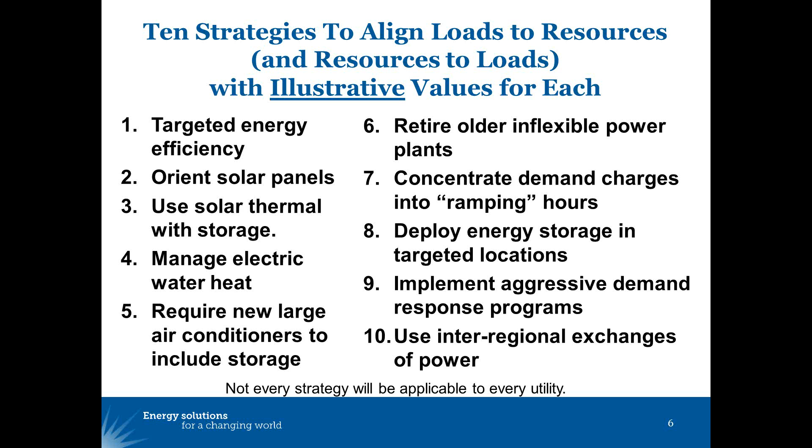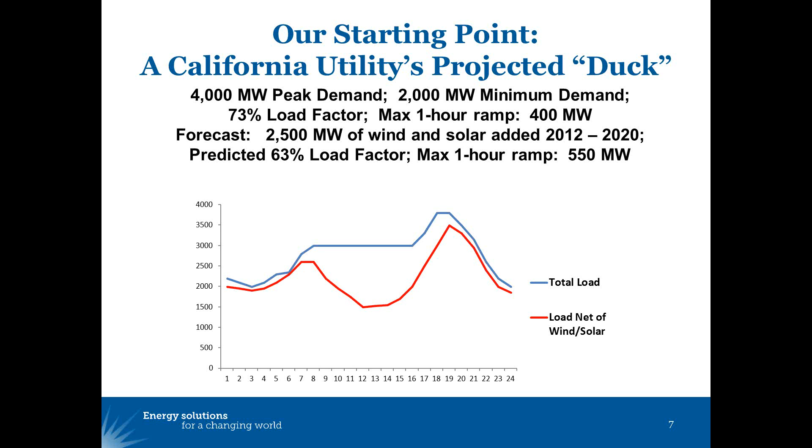So, good morning or afternoon, depending upon where you are. I'm in Olympia, Washington. Am I being heard okay, Dave? Yes. Good.

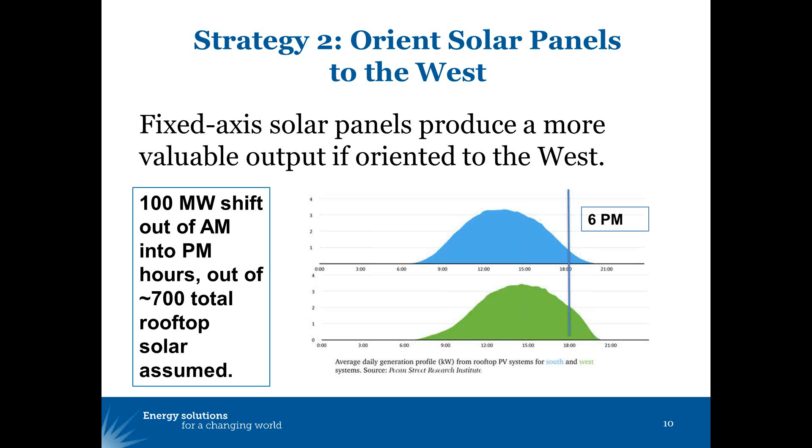I'm going to start by telling you a little bit about myself. I've been an economist and working in the field since the late 1970s. I'm an economist, but I tend to stray into technical issues. I was a founding member of what was called the Regional Technical Forum here in the Northwest that advises the region on a whole host of energy efficiency and energy planning technical issues. I've worked with RAP since 1998 in about a dozen countries and about half of the states of the U.S. And I've been an author or a co-author on almost a dozen different RAP publications, several on rate design, some on energy efficiency evaluation, and the most recent one that we're talking about today, Teaching the Duck to Fly.

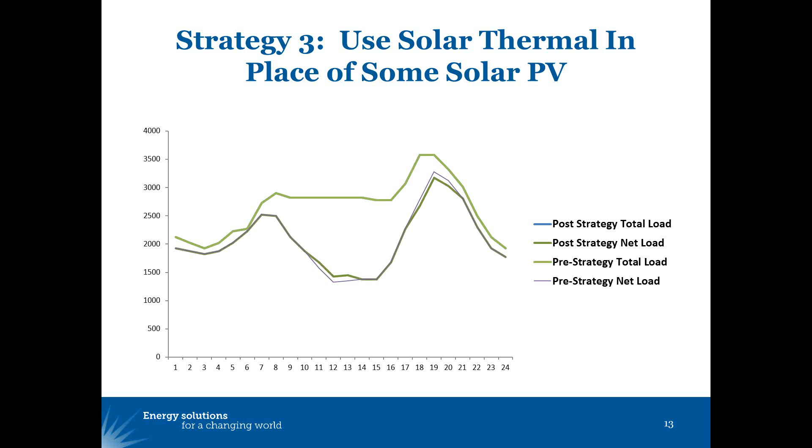So what is this duck? If you haven't met the duck yet, you will soon, or you just have. The California ISO has prepared what's called the duck curve. I think it was actually first created by San Diego Gas and Electric. But what it shows, very simply, is that as more and more solar is added to the California power system, solar meets the mid part of the day load, but disappears at night.

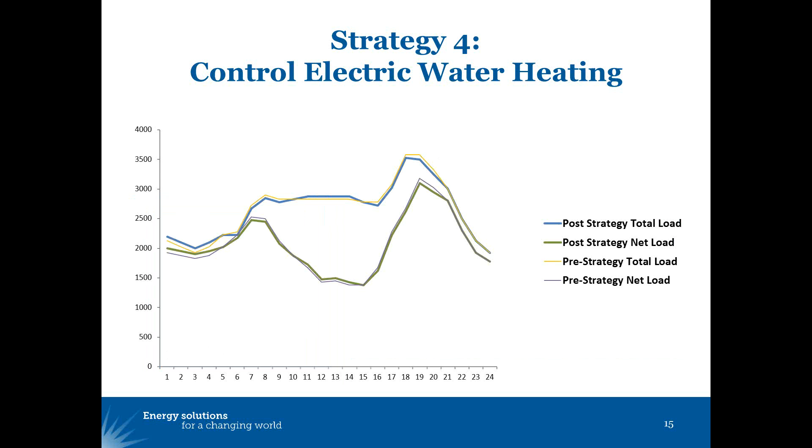And that leads to a situation where in the late afternoon hours, the non-solar generation system needs to ramp up immensely, in this case doubling its output in just 3 hours' time. And that is a very challenging ramping situation, we call it. There's also the risk in the middle part of the day of over-generation, that is, more generation being on the system than there is load, and something having to be curtailed.

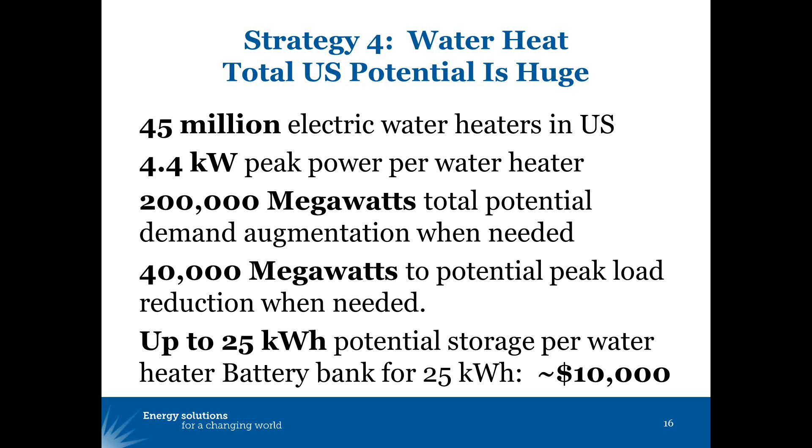And we're experiencing this in California, in Texas, in Hawaii, and in Germany today, where, because of the baseload plants that can't be turned down, nuclear plants in particular, and coal plants that can't be taken below their minimums, we wind up with more generation than we can handle. The causes of this challenge are really pretty simple. We've had variable loads forever. The electric industry grew up with those.

Wind is a variable supply. It's predictable sort of on an hour or 2 or 3 ahead basis. It's roughly predictable further ahead than that, but it clearly varies from day to day and from hour to hour. Solar is extremely predictable as to when it's going to be available, but it's predictably not available in the late afternoon when air conditioning loads and lighting loads tend to increase and the sun goes down.

But guess what? Ducks can fly. I mean, a duck in water has very much the shape of the California ISO graphic. The fat body floats, the tall neck breathes, and the duck just does fine in water. But a duck in flight has a whole different shape. It straightens out its body, stretches out its neck in order to have less wind resistance than it takes to wing. So our job today is to straighten this little ducky out. We're going to do that with 10 strategies.

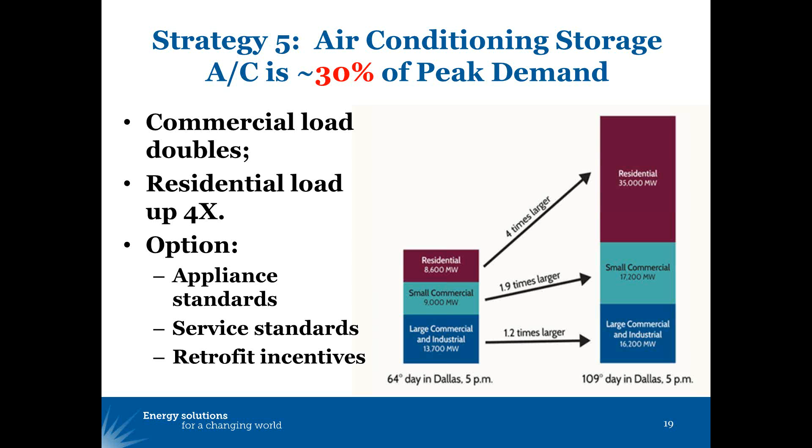But targeting measures have a 3-to-1 ratio between the on-peak savings and the off-peak savings. Kitchen lighting is a very good example of this. Kitchen lighting comes on at the time of the morning peak and at the time of the evening peak. Air conditioning is a huge contributor to the afternoon peak. So there's a number of specific measures that can be targeted for their afternoon peak orientation. And so with this 5% of total usage, the whole requirement shifts down, but shifts down more during the peak hours than during the off-peak hours.

The second strategy is orienting solar panels to the west. Most residential and most rooftop solar systems are on a fixed axis. That is, their racking is fixed. They only point one direction. And that output is a little more valuable if it's pointed to the west. Here graphically I show what the output is at 6 p.m. In blue, the panels are pointed south, and in green the panels are pointed to the west.

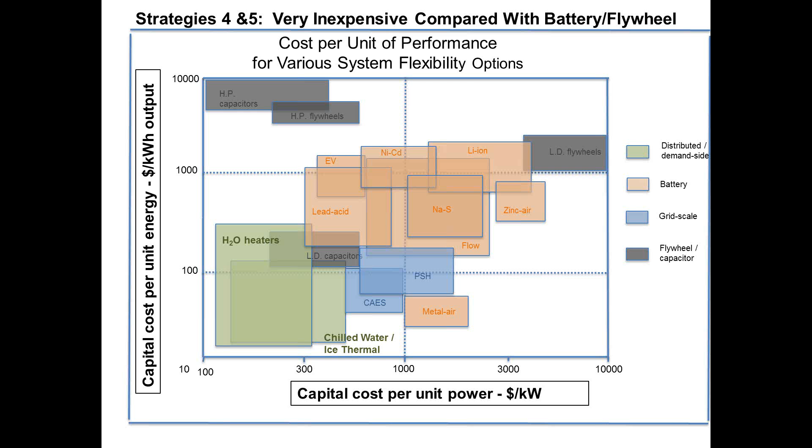You get about the same amount of total production, but you get a whole lot more production during the late afternoon hours. And here I assumed a 100 megawatt shift, taking it out of the earlier morning hours and moving them into the later afternoon hours. That's out of a total that this utility forecasts of 700 megawatts of rooftop solar. You'd need an incentive in the pricing and an incentive to the installers to take advantage of this, but it's a fairly modest strategy. And it shifts.

Now you'll notice that each of these is shown compared to the cumulative effect of the strategies before. And we do this so that you can see that each one of these strategies makes a very small difference. And here you see that the net load is increased a little bit in the morning because the solar isn't producing as much, and it's decreased a little bit in the afternoon when the solar is producing a little bit more.

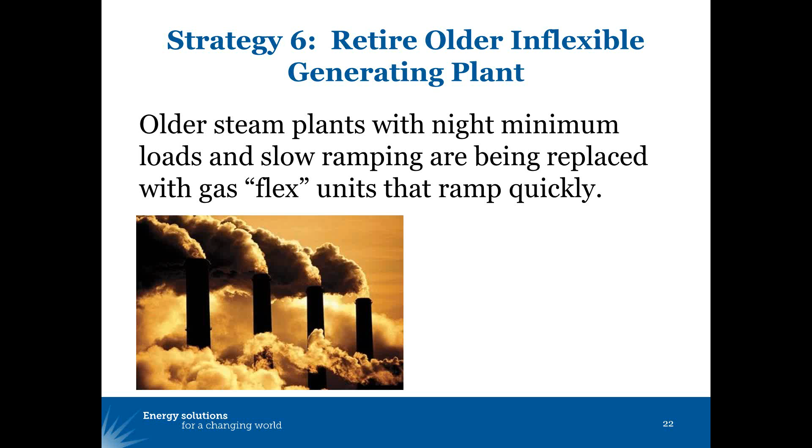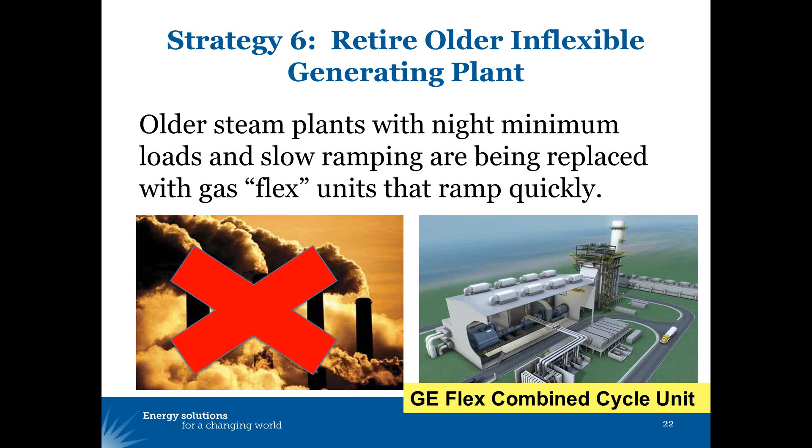Here I've substituted 100 megawatts of solar thermal for 100 megawatts of the utility scale photovoltaics that this utility has forecast. That's out of a total of 1,500 megawatts of utility scale solar. So I've only diverted a pretty small share of that to solar thermal.

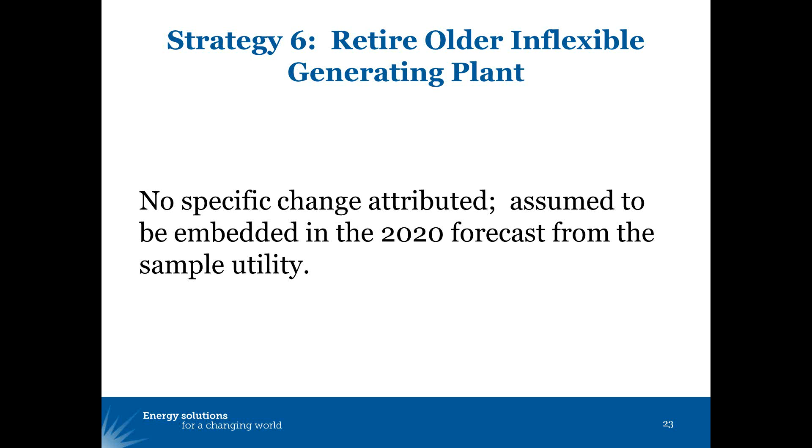And once again, we've reduced the solar output in the middle of the day a little bit, and increased the solar output at the end of the day. So we've straightened out the neck of the duck here. We pressed up the belly and straightened out the neck a little bit.

The fourth, and this is one of the most important and probably least well understood, is to control electric water heating. Grid control of electric water heating is an available technology. What you want to do is supercharge the tank during low-cost hours so it's full of hot water at a temperature hotter than we normally store water at. Install a blending valve, and blending valves have been around for a long time. They're actually mandatory in new shower valves that will blend the water back down to a temperature that the customer doesn't have any risk of being scalded.

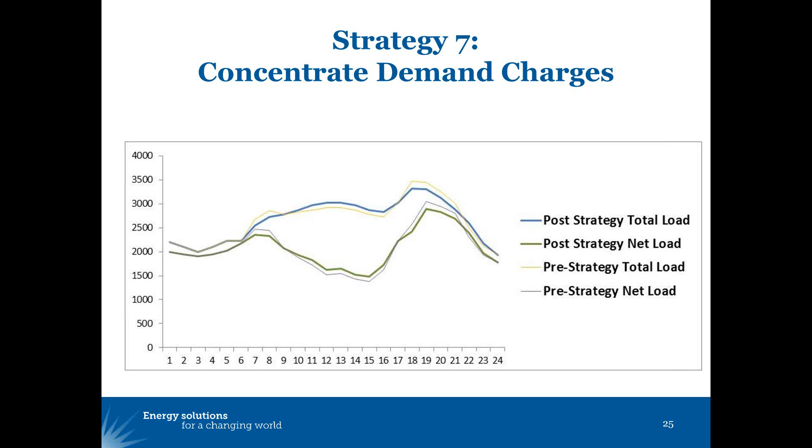The illustrative utility has about 8 or 9% of the water heaters on its system as electric water heaters, according to the California Appliance Saturation Survey. So I assumed it could gain control over a little more than half of those water heaters, which would allow it to shift 300 megawatt hours a day around in time. The nice thing about a supercharged tank is it holds a whole day's worth of hot water, so you can heat it up at any time of the day or night, and it will carry you for 24 hours.

To get the water heating load off of the peak hours and put it into either the evening, the nighttime hours, or put it into the middle of the day when solar production is high. And here again, we shift the duck just a little bit. Each of these strategies is a small shift by itself, but you'll eventually see that this duck is changing its shape. Now, the water heat potential nationally is huge.

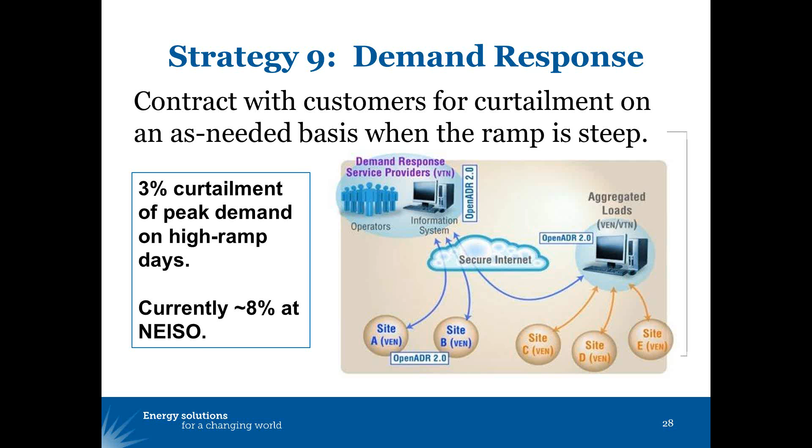There's another thermal strategy here, which is to require new air conditioners to have 2 hours of storage. And there are a lot of air conditioners that have 12 hours of storage. But the strategy is to just have a utility standard that requires new air conditioning units over 5 tons, that is, larger than residential size, to include at least a couple hours of storage under grid control.

I'm going to stop here for a second and ask Dave if we've got any questions that I need to address. Jim, there was one in regard to strategy 2, orienting solar panels toward the west. The questioner, Peter Savio, wants to know what shift in degrees is required to do that.

The example I gave was from a study that looked at a full 90-degree shift from south to west, and I don't have the expertise to tell you what the optimal shift is, because as you shift off of south, you slightly reduce your total production during the day. And so there's some optimal point where you get the most value. And the only way to measure that really is to know the utility's cost curve during the day. And that actually will vary in different parts of the country.

Great, thank you, Jim. That's it for the questions. You can move along. Okay.

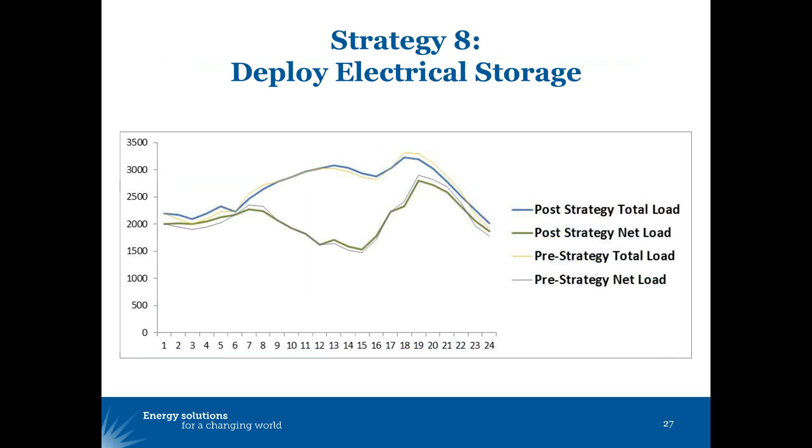The second is utility service standards. There are a lot of utilities that have existing service standards that say we will not serve certain types of loads unless they meet certain kinds of conditions. And it may vary from state to state whether utilities have the authority to adopt a standard like this and the regulator has the authority to approve it. But there certainly is the ability, I think in every state, for the utility to adopt a higher rate for service to uncontrolled air conditioners than it charges to air conditioners that have storage. A simple time of use rate will do that. A hookup rate, that is a capital contribution, is what will actually move builders and HVAC installers to change.

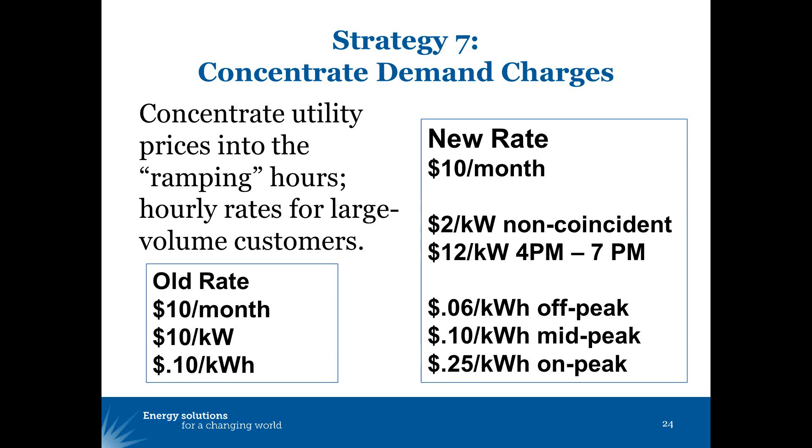And the third is a traditional utility retrofit incentive program and new building incentive program to entice the installation of storage air conditioners. So there are 3 ways to get this. I wanted to spend more time on storage, even though I've put a very modest amount. This 2-hour storage on 100 megawatts is a tiny little bite in our duck. I think that storage air conditioners could be easily 10 times as big a contribution as I've shown, and storage water heaters could be 2 or 3 times what I've shown.

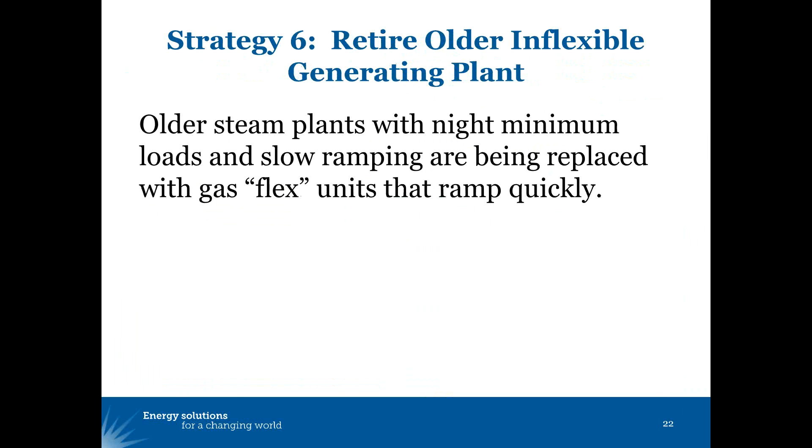And that's actually what's helping Germany with their very high solar saturation, is the fact that they're tied to a larger grid. This strategy obviously doesn't work for island systems like the Virgin Islands or Puerto Rico or Hawaii, where they're not interconnected to other regions. But here it's a relatively modest shift relative to the amount of interconnection capacity that exists, but it's a pretty significant shift on this duck here. So this duck is just about ready to spread its wings and fly.

So how did we do? Before the strategy and without solar and wind, we had a 73% load factor. And with the solar and wind, a 63% load factor. After the strategies, we now have an 83% load factor for the day. The hourly maximum ramp is now 340 megawatts versus 400 that's being met today, and 550 by 2020 with wind and solar and without these strategies. So we've got a system that's easier for the utility to manage than where we are today.

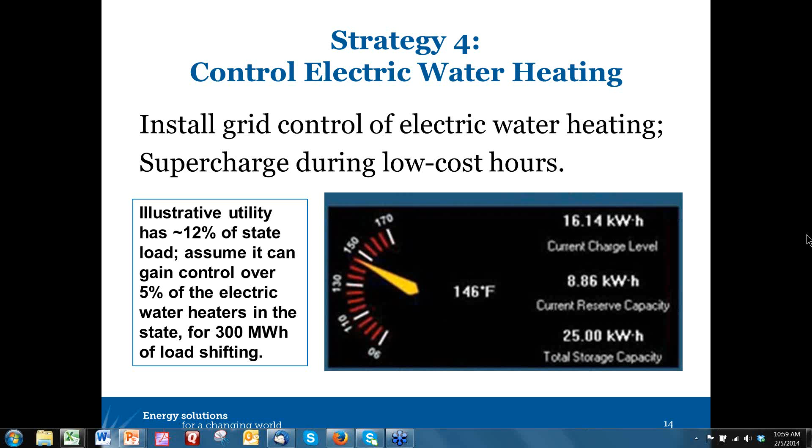The retail load is on until 9 or 10 o'clock at night, and the residential load peaks during that period. The residential peak is typically 6 to 7 p.m. The commercial peak is 4 to 6 p.m. They collide in the 5 to 6 p.m. period, and that combination does create the peak for most summer peaking systems. And so I did include the targeted energy efficiency and water heat storage as residential strategies. I don't disagree that some better targeting of residential air conditioning would help.

I did not include residential air conditioning cycling because many utilities in afternoon summer peaking regions already have very strong programs. Southern California Edison has over 1,000 megawatts of residential air conditioning under a demand response program that's been in place for 30 years. So that one resource has certainly been proven, and in areas where it has not been deployed, it belongs in this strategy list.

Thanks, Jim. Back to the reorientation of PV arrays. Tilting solar, how can installers be incented? And can you use traditional TOD factors, and if so, how? I'm not a solar installer. I don't have expertise to answer that, but I can speak to the technical side of it. On the incentive side, a time of use rate does provide that incentive, or where there are utility cash incentives for installing solar, which there are on many systems, they can be $2 a watt if they're pointing south, and $3 a watt if they're pointing west, or something to that effect, and the incentive will show up in the rebate amount.